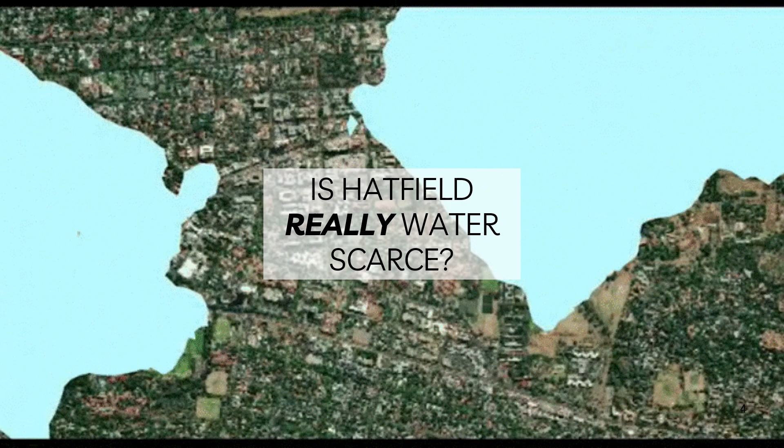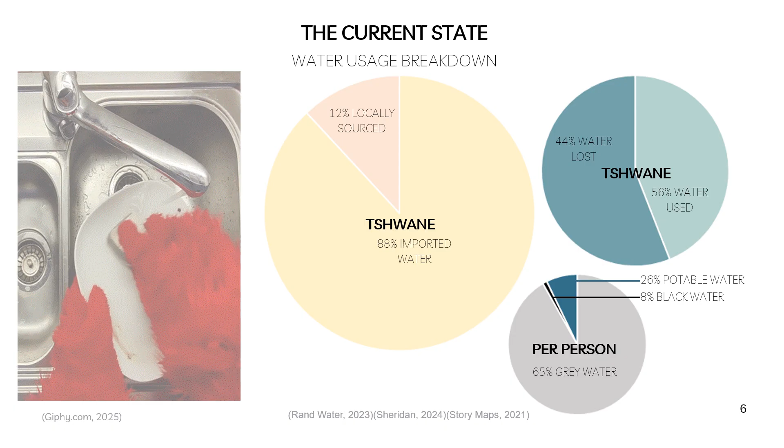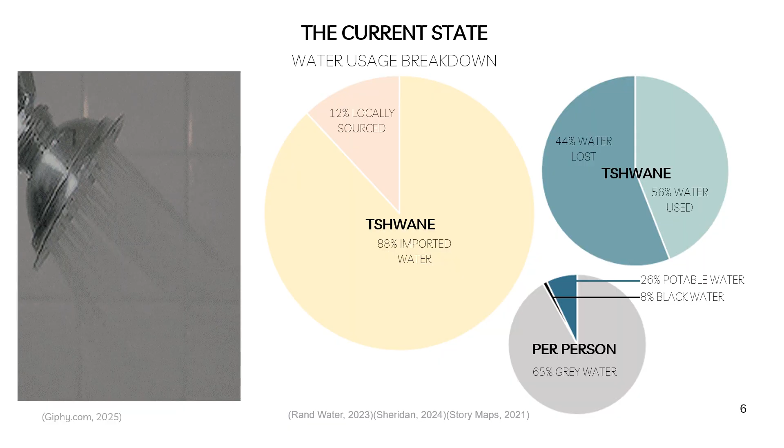Considering wastage, we first look at Tshwane as a whole. We learn that 88% of the water is imported. Of the total water available for Tshwane use, 44% is lost due to leakages and or mismanagement. And if we look at personal water usage, 65% of the water we are able to use goes to grey water.

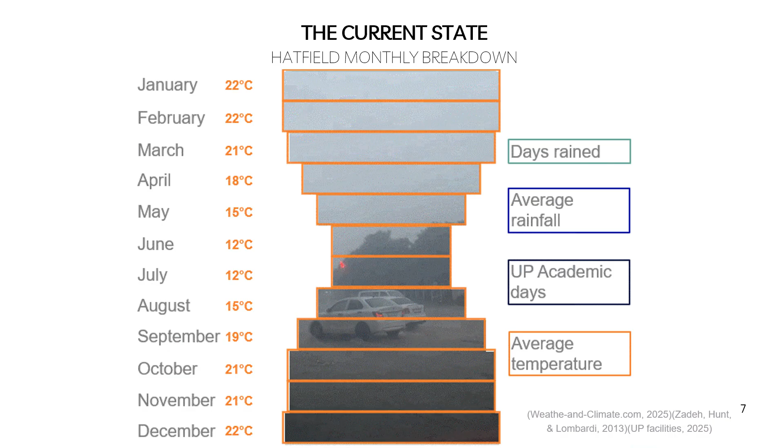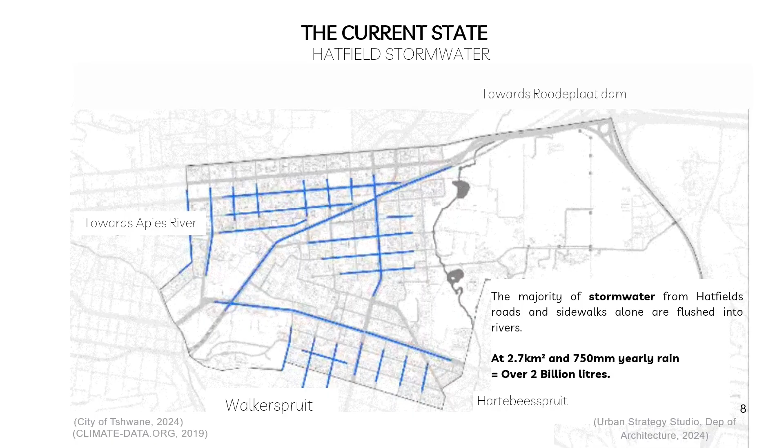But if we start looking into the monthly rainfall of Hatfield alongside the 9 month economy and fluctuating temperatures, we ask ourselves if this is not a possible resource to be tapped into. The majority of stormwater runoff is flushed into rivers, which carries it out of Hatfield. In some cases, water is captured and stored for irrigation purposes, such as UP's Javett Art Centre and Pretoria Boys High School. All of Hatfield's yearly water needs could be provided from its own stormwater, twice.

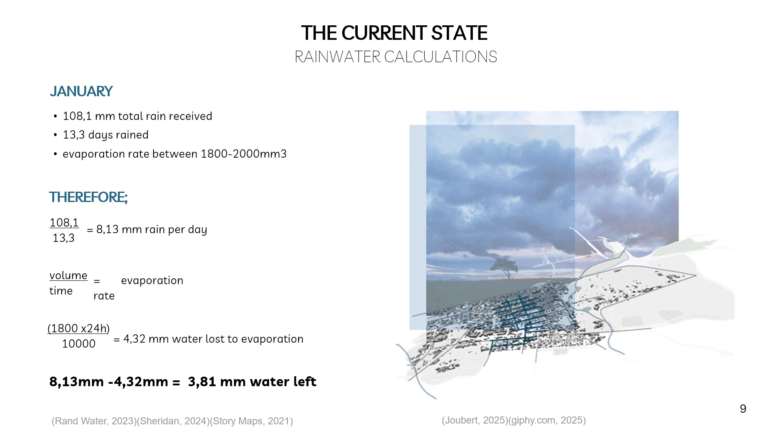So if we look at a typical month like January, we can calculate that we receive about 8.13 millimeters of rain per day for 13.3 days. And during those days, due to Gauteng being a medium evaporation ratio zone, we lose just more than 50% of water to evaporation. Based on the amount of residents and the average water usage per person, Hatfield uses about 1,286 megaliters of water annually. But if we take an annual rainfall, evaporation, and additional loss into consideration, we can clearly see that the pedestrian areas of Hatfield still receive more rainwater annually than the need. And the total area of Hatfield has the potential to generate twice as much water than the current need.

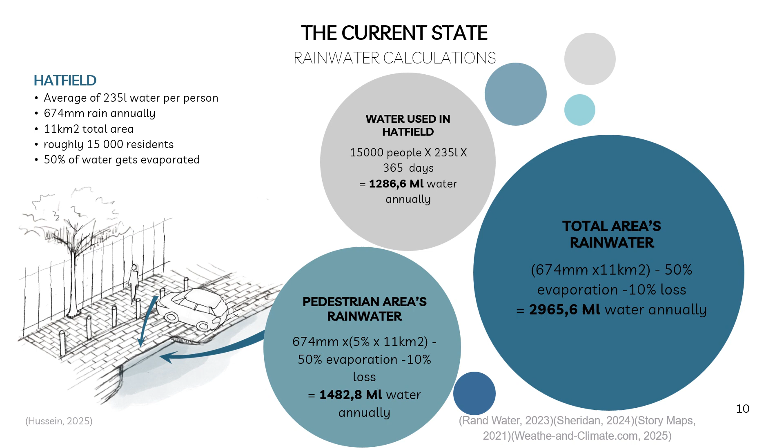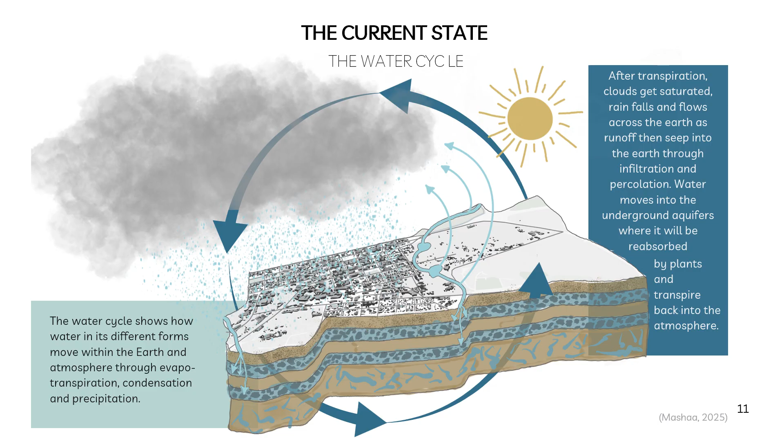The water cycle goes beyond the surface, and in order to look at our site's water situation holistically, we need to consider groundwater as well. In addition to rainwater, we have groundwater which forms part of the water cycle. The springs of Pretoria have supplied water for the past 160 years since the city was founded, and if managed properly, they can continue to do so.

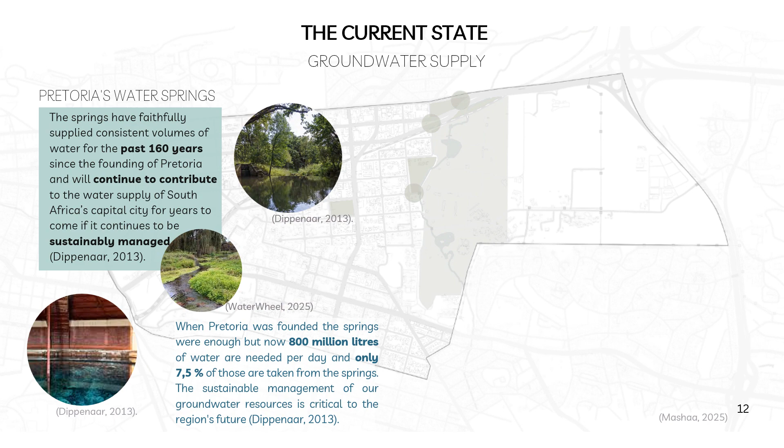However, unmonitored and unregulated abstraction of water resources can result in significant ground instability and endanger spring and river flows. Most highly urbanized areas have fair to poor conditions, and our site falls in one of South Africa's stressed catchment zones with strained water resources.

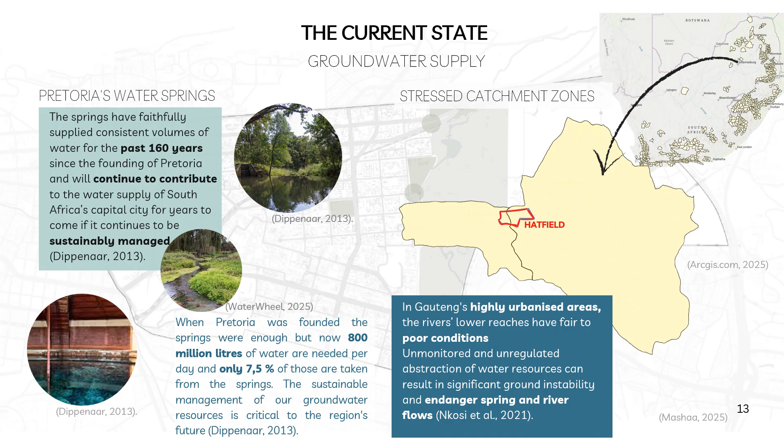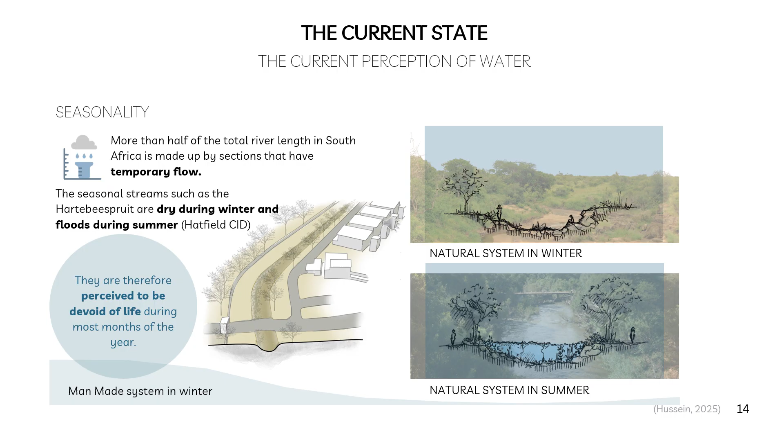Based on our previous analysis regarding water movement patterns and water usage patterns, we can conclude that during the months with the heaviest rains, the largest population of Hatfield, the students, are not in Hatfield. The water streams on Hatfield are therefore perceived to be devoid of life during most months of the year. In a more natural stream setting, wider riparian zones act as buffers which allows water levels to rise and fall depending on the season, and users are able to visually interact with different ecologies throughout the year.

Water enhances spaces, encouraging the creation of communal areas. Based on our survey, we have come to the conclusion that currently there are only around 3 public spaces that contain water features for the users in Hatfield to interact with. Access to the best quality third places are limited to private institutions and residences which are able to regulate and maintain these areas. This leads to the perception of lack of accessible spaces where water is a well maintained feature.

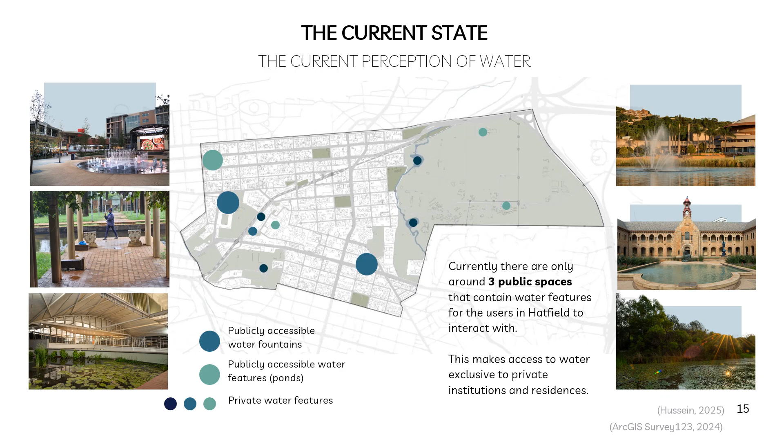In 2024, Urban Strategy Studio mapped 831 water points throughout Hatfield, the majority of which are fire hydrants. This map shows that there are no water points which are free, safe to consume, or easily accessible by the public.

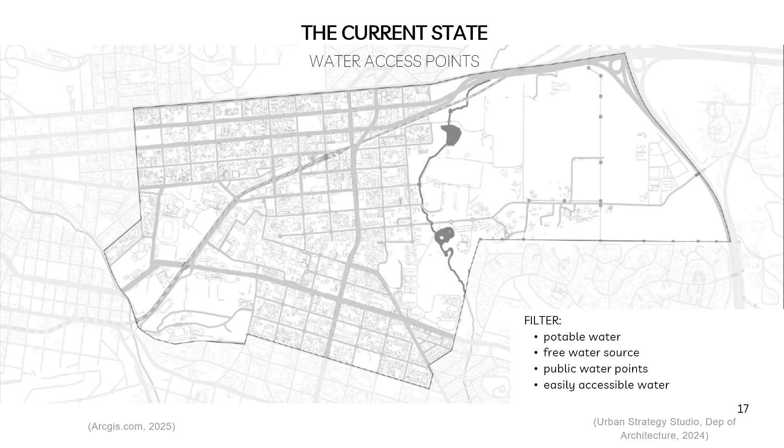We engaged with stakeholders via an unofficial question and answer session. UP Facilities and Hatfield CID are the institutions which have the largest influence on the holistic perception of Hatfield. UP owns roughly 60% of the land in Hatfield and are one of the largest consumers of water in the area. However, they are not optimally utilizing a circular water system. For example, 160 million liters of water is used on the Hillcrest campus and none of it is recycled.

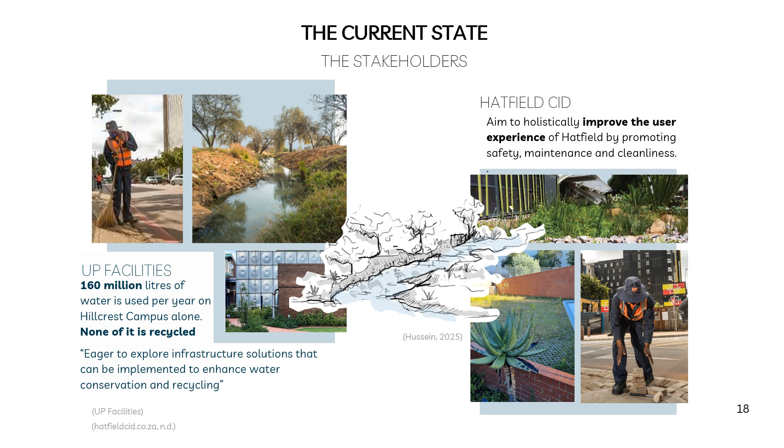Both stakeholders are looking to improve the user experience in Hatfield. This goal can be achieved by improving water systems, which improves the urban fabric. The problem state.

We have been bombarded by the media so much that Hatfield is now seen as a hyper-urbanized, water-scarce place. But the reality is that Hatfield has an abundance of water as well as some spaces that do interact with nature, but this is not considered due to its inaccessibility.

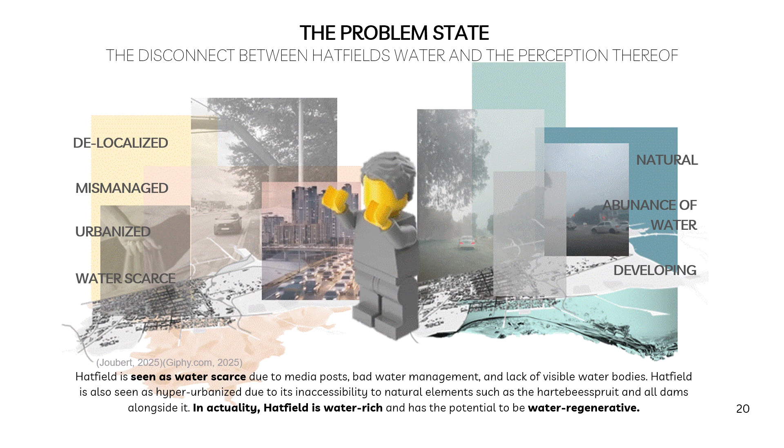We would like to address this disconnect and shift the perspective to not only what Hatfield is, but what it can become.

The current linear water system starts off with a collection of water through natural streams which flows into man-made reservoirs where it is stored.

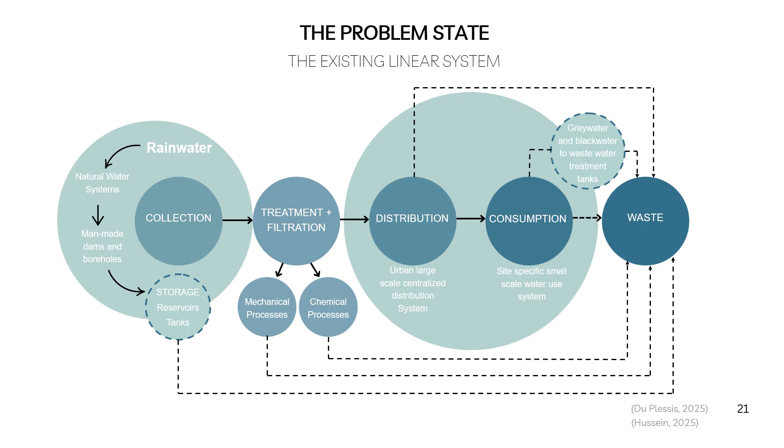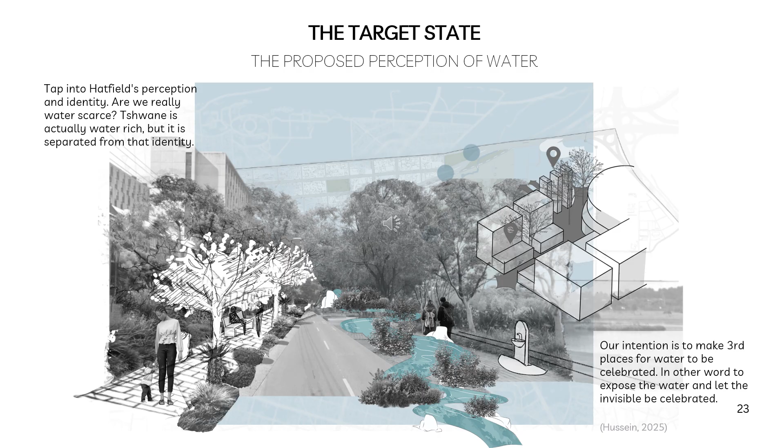Our intention is to make third places for water to be celebrated. In other words, to expose the water and let the invisible be celebrated.

The proposed circular system introduces wastewater back into the water cycle, therefore turning wastewater into a resource.

Instead of water being discarded after the consumption stage, it is sent to the wetlands in a system that mimics a more natural setting. Rainwater harvesting systems, namely green roofs and bioswales, are used to increase water collection.

Clean water is then reintroduced into the system after biofiltration has been completed in the wetlands.

The Sheffield Grey to Green project is a medium-scale intervention that manages stormwater while enhancing urban biodiversity. The shaded walkways, pedestrian bridges, and public seating incorporated into the design contribute to an improved experience of the space.

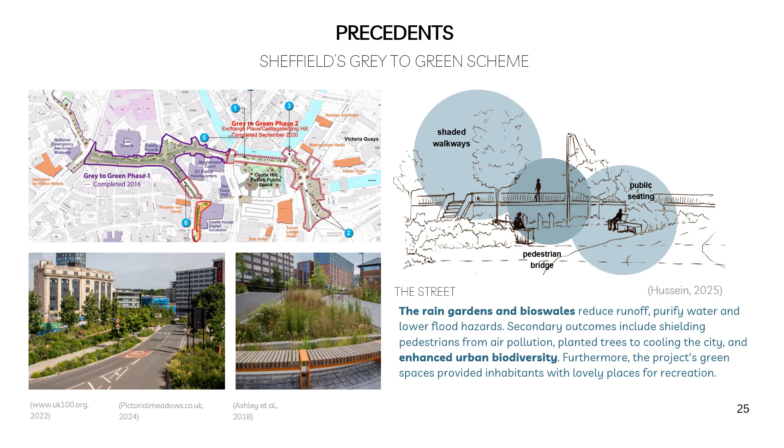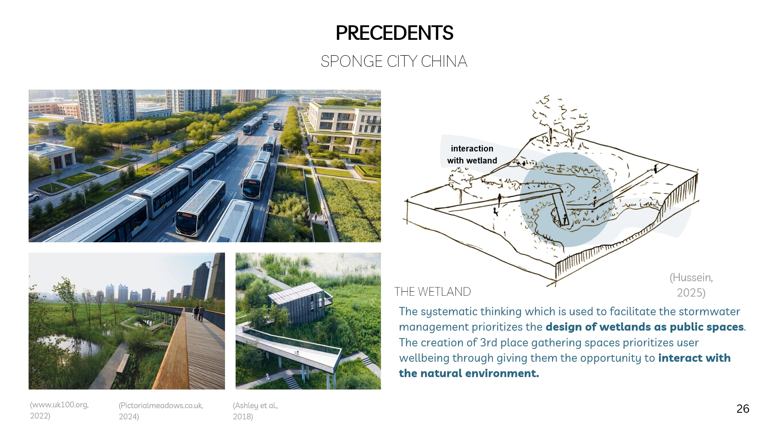The sponge city concept was coined in China, and we have examined it as a successfully implemented large-scale intervention. We were informed by the transformation of the wetland components into public spaces by encouraging visual interaction through raised walkways.

Our proposed intervention can be measured against the ecosystemic services theory that emerged in the 1970s. These include regulating, provisioning, cultural, and supporting.

Our intervention will regulate itself, not only through natural regeneration, but also through environmental education to the users, who will contribute to the space's livelihood.

There will be provision of food and fresh water for both people and animals through edible plants, fountains, and ponds.

It will give people a place for recreation, relaxation, and cultural expression through the creation of third places.

It will further support the larger ecosystem by improving air and soil quality, as well as increasing the likelihood of rain. It will improve the local climate and will contribute towards counteracting global warming.

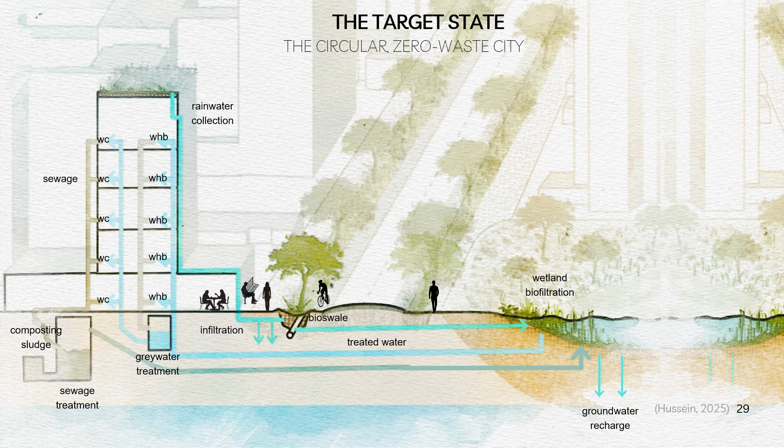We would like to achieve a circular zero-waste city in regard to water resources, and these are the systems to support that.

We looked at grey water and how that can be reused in the buildings. Grey water contains both organic and inorganic contaminants, such as soap and detergents.

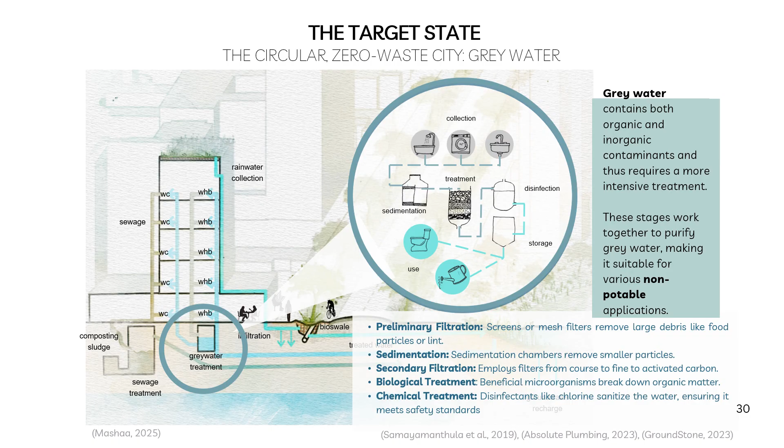It goes through a fairly intensive 5-step filtration process to make sure it meets safety standards.

Next, we have brown water treatment, which is a multi-step process that produces recycled water for non-potable use and has the potential to produce power and fertilizers as byproducts.

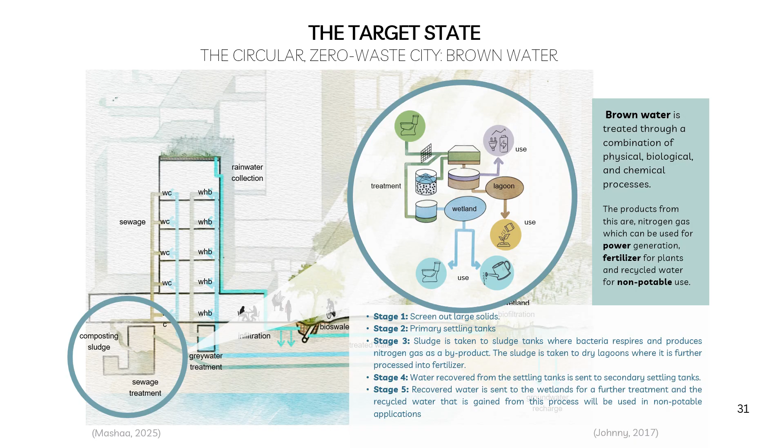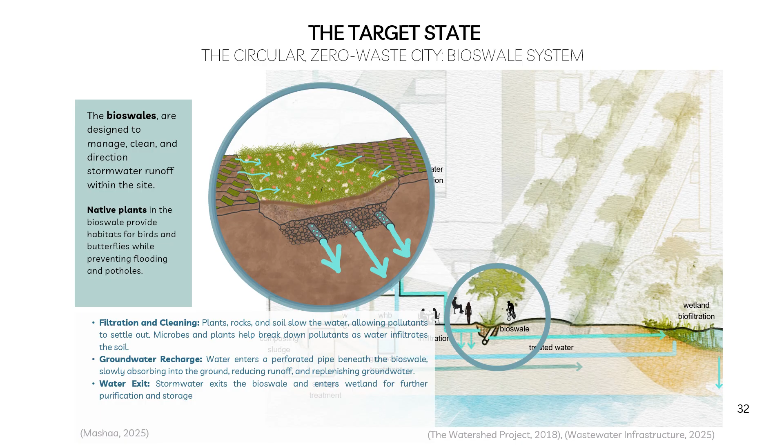We intend to line the streets with bioswales that help to clean and transport the water to our constructed wetlands for further treatment. The planting palette will largely consist of robust native plants.

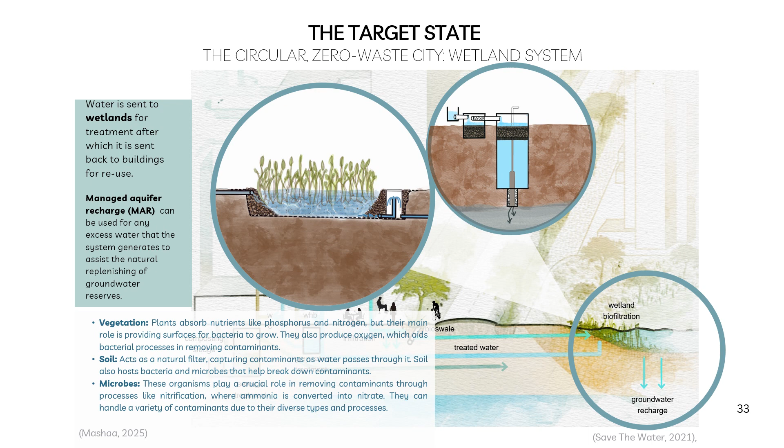The water is treated in the wetlands through biofiltration and is sent back to the buildings and parks for reuse. While the wetlands themselves recharge the groundwater systems, managed aquifer recharge can be used to supplement this.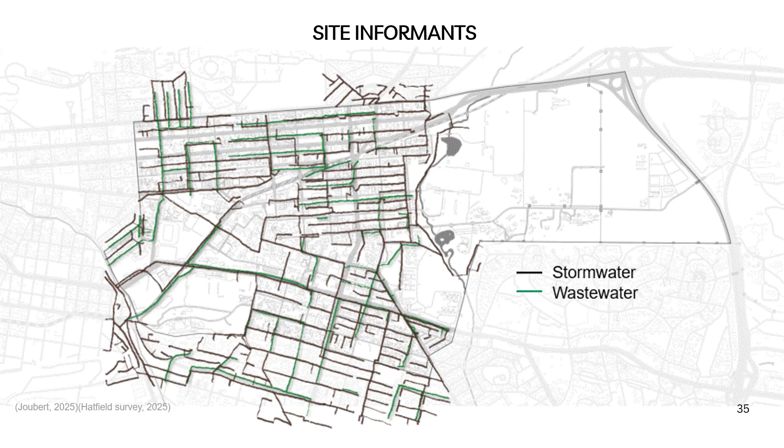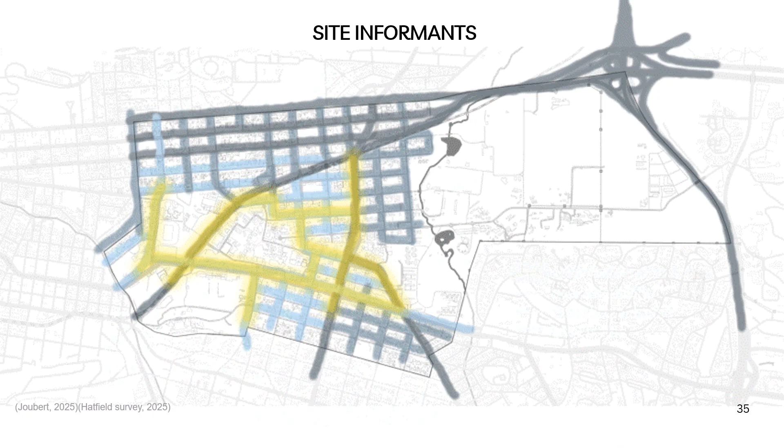Looking at the physical attributes of Hatfield, such as existing systems and contours, alongside movement patterns and sidewalk conditions within the zoning context, we can clearly identify areas that overlap. These zones will inform where our intervention is needed most and how we'll approach it moving forward.

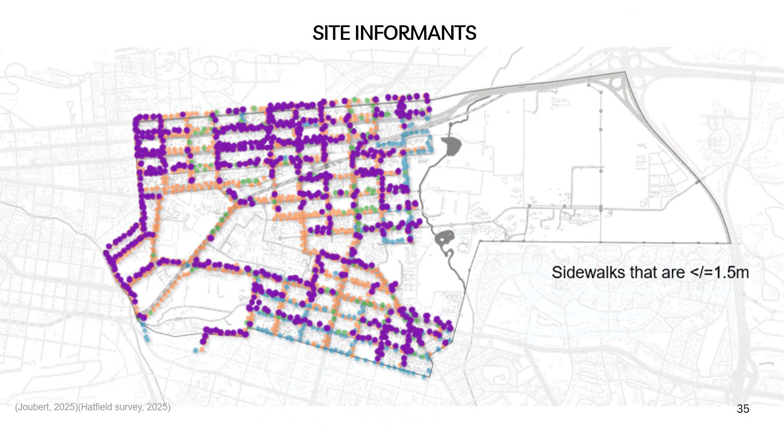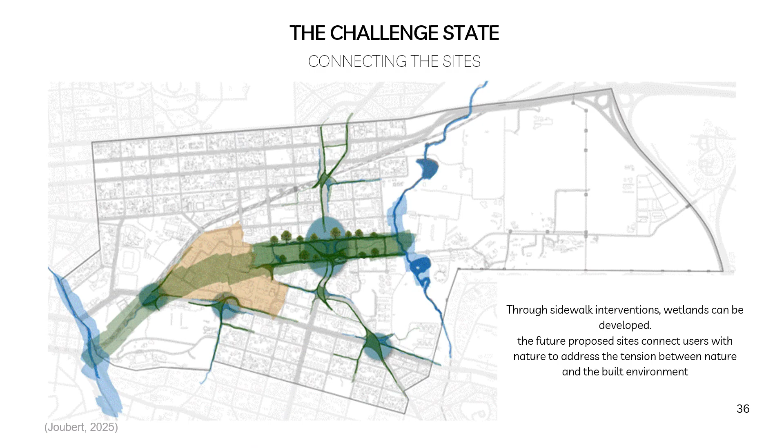Looking at our identified possible intervention zones within the context of Hatfield, we start to conceptualize how we want to address the disconnect in Hatfield by linking our spaces by means of intervention to the existing natural environment. This aims to create a uniform view of Hatfield.

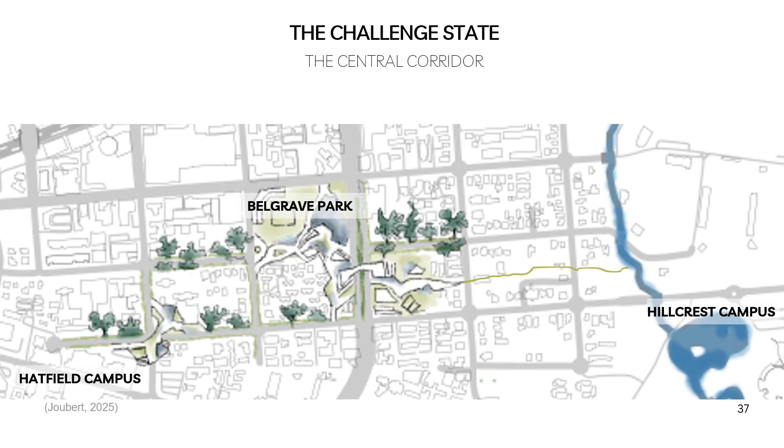Zooming in on the first intervention zone, we start to conceptualize how we want to link Hatfield and Hillcrest campus through our intervention by means of a multi-level central corridor. The main sites along the central corridor framework are Hillcrest campus and Hatfield campus, with Belgrave Park situated as a central point.

We intend to contribute to the positive perception that these spaces currently have in Hatfield by enhancing the network connecting these spaces. The central node of our intervention brings together a diverse collection of users moving throughout the site.

The site is, however, not comfortable for the user due to Jan Shoba Street, a high traffic road which does not include optimal intersection spaces for pedestrians. This hampers the safety of pedestrian movement across the road.

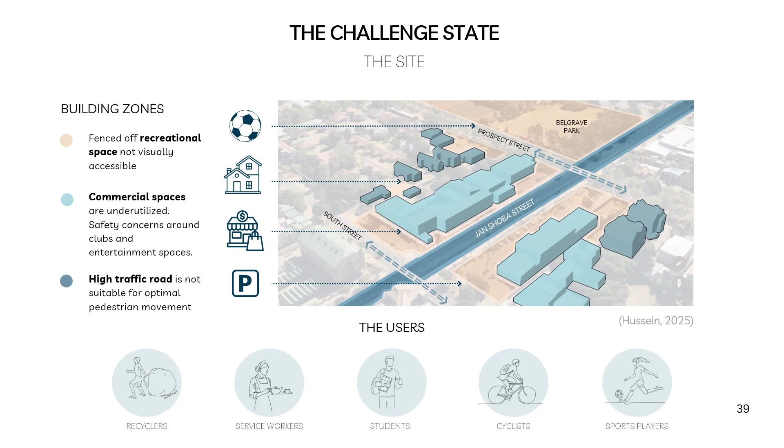The utilization of space currently consists of commercial spaces with parking facing the street. This does not allow for comfortable transition spaces along the street edge.

To cultivate functional urban space, we address the street intervention by softening the pedestrian crossing, widening the street edge, and incorporating planted buffer spaces which provide space for a safe and interactive transitional space along the street edge.

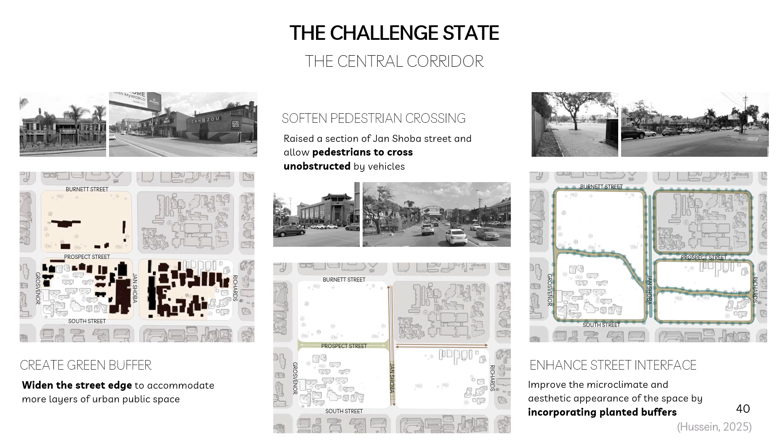This will lead to a more functional public space with commercial and recreational activities and an overall improvement of the microclimate and aesthetic appearance of the sidewalk zone.

Enlargement of the planted buffer zone between the street edge and the built structures creates space for interactive spaces such as meandering walkways, restaurants, commercial stands, and public seating.

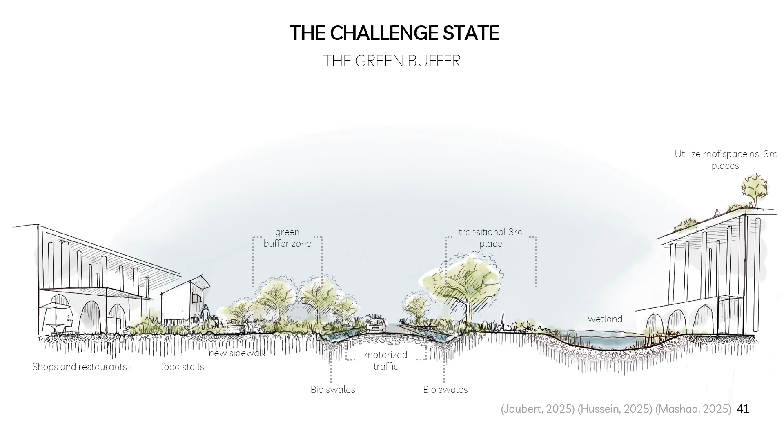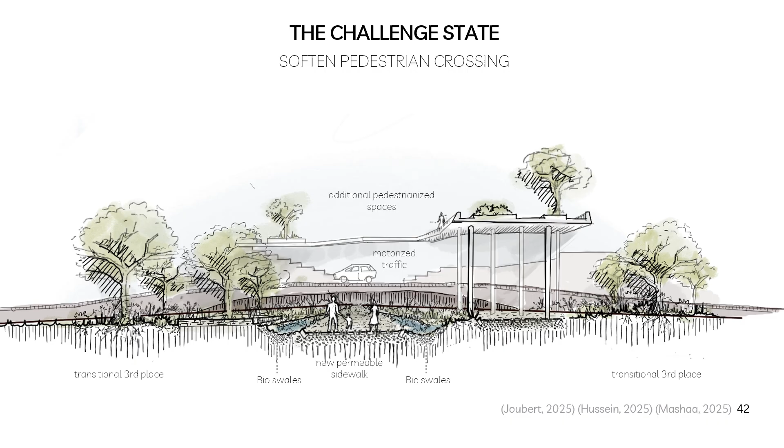This draws a more diverse range of users into the space, slows down the pace of dynamic movement spaces into passive, lingering spaces. Interacting with spaces lower and higher than street level experiments with alternative ways for users to move through the site without obstructions by vehicles, thus transforming the crossing itself into a functional space.

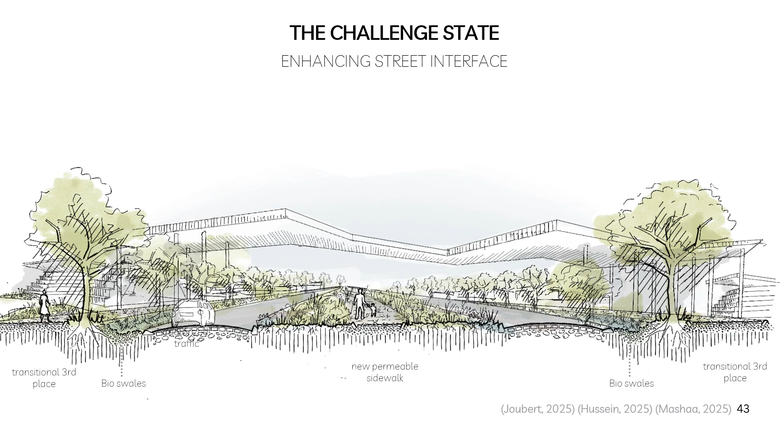Expanding sidewalks and creating a central sidewalk along Jan Shoba Street allows users to move along a space which feels protected from vehicles on the street edge. Hard surfaces are converted into permeable surfaces, allowing for an increase in water infiltration.

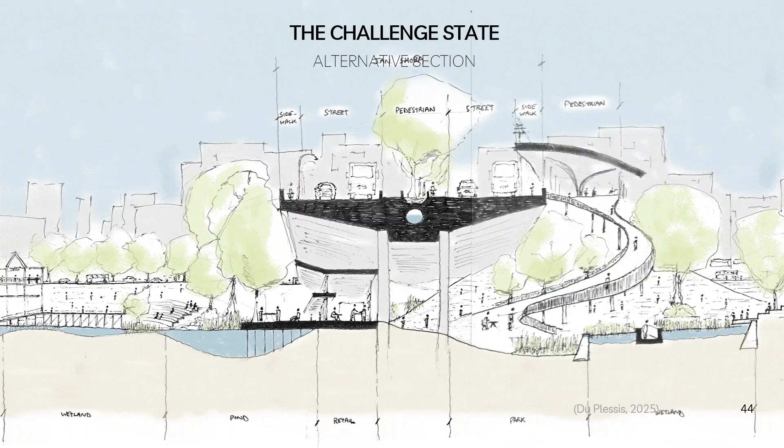The current urban landscape of Hatfield largely operates on a two-dimensional plane. Private stakeholders developed vertical expansion, such as the Javett Art Centre, where programs such as underground parking, public courtyards, galleries, pedestrian walkways, and roads are laid on top of one another.

It is vital for the public realm to expand vertically to ensure efficiency of the complex programs within a city.

The movement of water throughout the site is celebrated through the exposing of the biofiltration system. The prioritizing of natural systems leads to increased biodiversity. This automatically leads to the creation of surrounding public spaces, which have the necessary environmental features to improve user well-being.

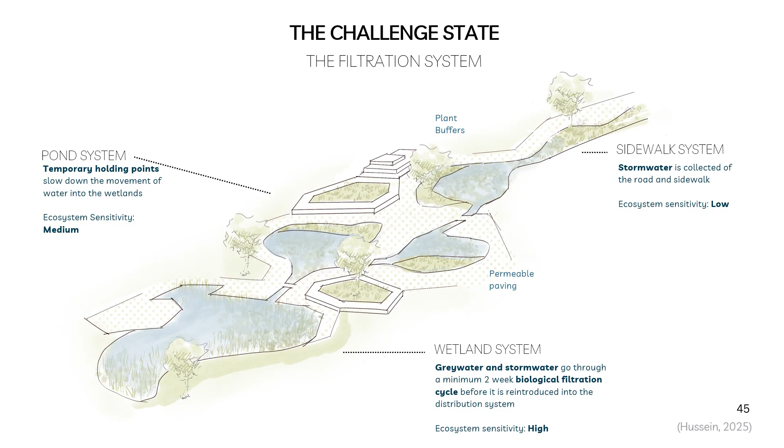The system begins at street level, where stormwater is collected off the road and sidewalk. Holding points slow down the movement of water into the wetlands. From here, water is reintroduced back into the distribution system.

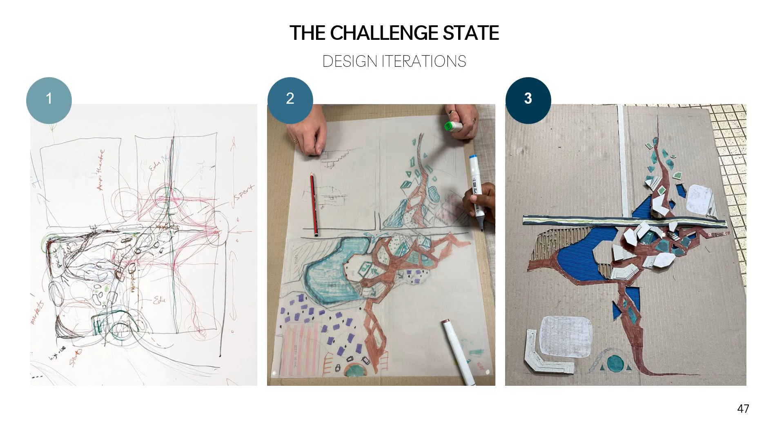Here we have our iteration process of how we can apply our desired system spatially. We made use of various techniques and started exploring mass and geometry.

The project begins with connecting the space along Prospect Street to create our development zone. The restoration of the existing built space into open green space allows for the establishment of the biofiltration system throughout this open space.

In the second phase of the project, a pedestrian walkway is introduced, which draws users through the space and encourages reflection on our connection with the natural environment by exposing the users to natural water systems.

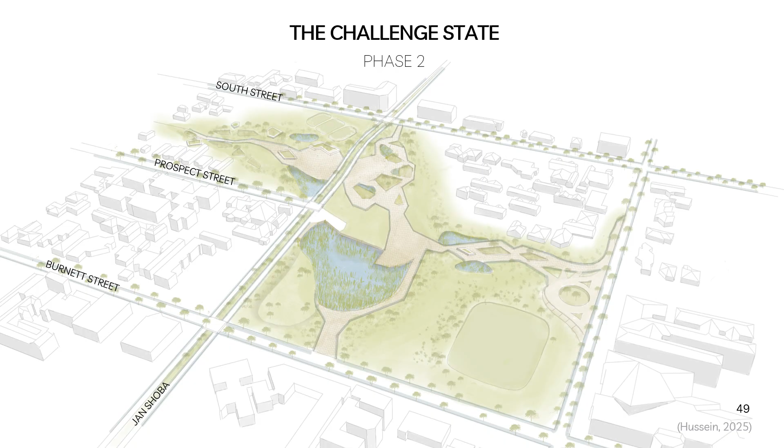The final phase of the project is the expansion of the space in the vertical plane by breaking up the space into various levels. This allows the user to experience the space through various lenses.

The opportunity is provided to the user to experience an encompassing view of their surroundings from the raised pedestrian walkway.

As the user moves from the peripheries of the space towards the main wetland feature, the organic forms create a diverse assortment of spaces, from exposed courtyards to covered market spaces.

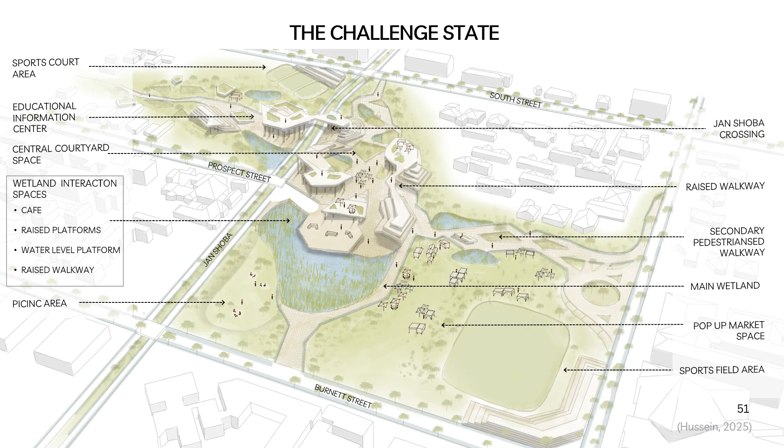This space feeds into the wetland, where users interact with it through platforms at various levels. The main entrance is at the corner of Prospect and Grosvenor Street, where we factored in a drop-off zone.

We also have a multifunctional space that will primarily house temporary pop-up markets and has the potential to evolve in the future. The picnic space is zoned as a semi-private space where people can sit and relax, but still enjoy the view of the wetland.

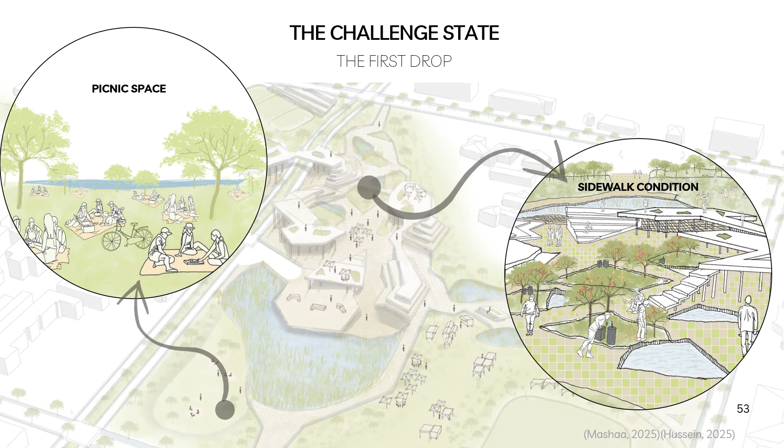Sidewalk conditions favor greater user interactions with the space. We have interactive educational as well as interactive program spaces where people can learn more about our proposed systems through lived experiences.

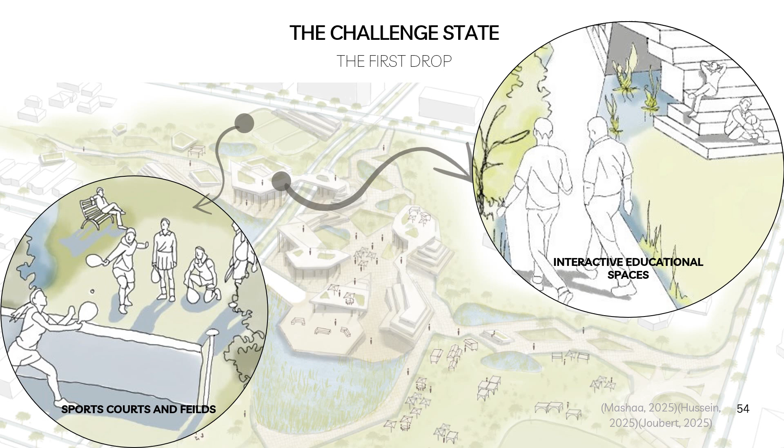Sports courts and fields are proposed as an inclusive recreational element, which connects to the already thriving culture of sports and recreation in Hatfield.

Currently, at the intersection of Jan Shoba and Prospect Street, the space is monofunctional. It is dominated by hard-surfaced parking spaces.

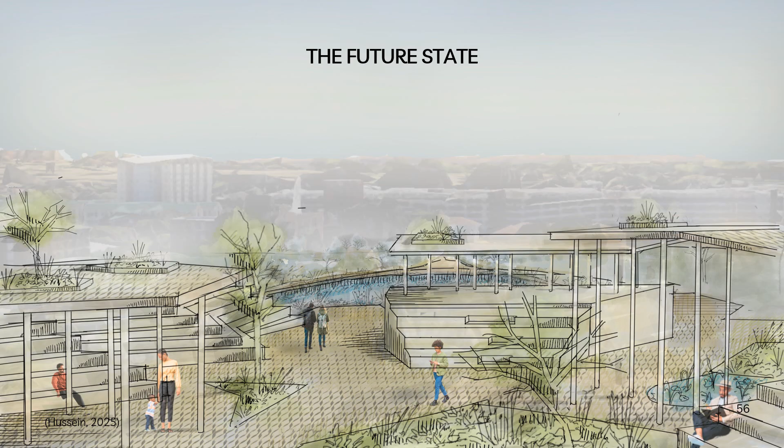In the future state, these hard surfaces will be replaced with permeable blocks and green surfaces that allow for greater infiltration.

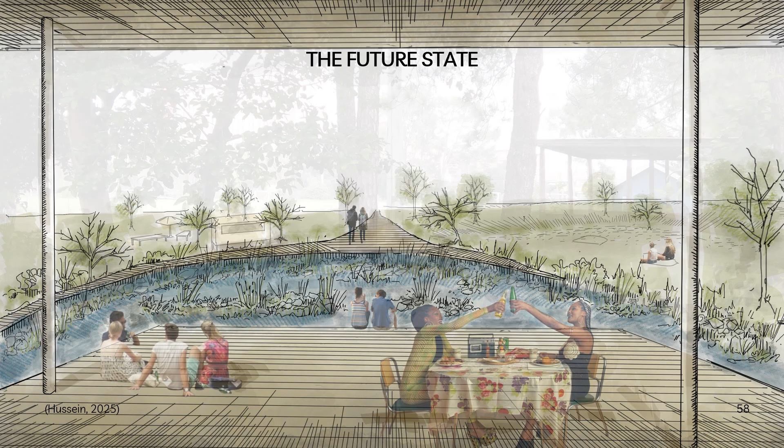Currently, Belgrave Park is fenced off and caters only to a select group of users who play sports. In the future, this space will be opened up to be the defining point of our filtration system, our wetland, which will become a thriving social hub as well as a functional stormwater drainage system.

The Raindrop effect is a project that will send through ripples of impact in the Hatfield community.